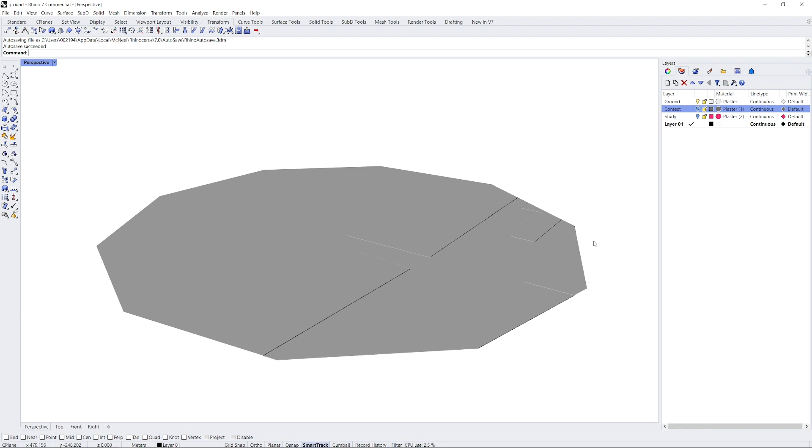The ground model should have minimal details and simplified topography. Only include essential grading, otherwise it can be created as a flat plane. Ensure the ground does not contain any large holes, seams, or disconnected surfaces. The ground should also extend past the extents of all context buildings.

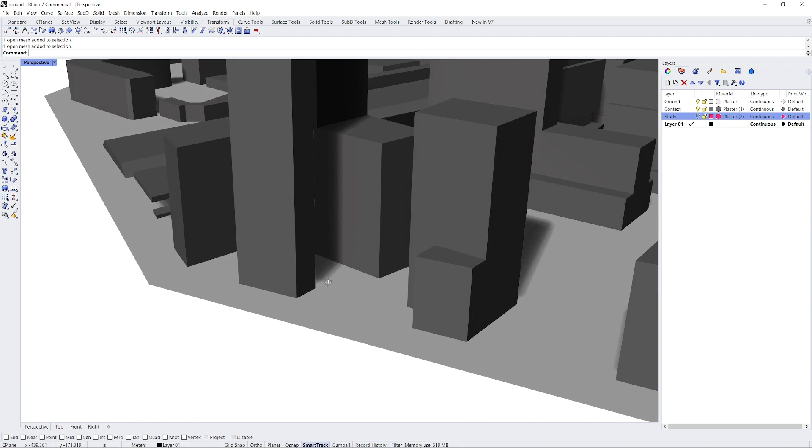The context model includes all surrounding buildings within a 250 to 300 meter radius of the project site. Ensure that all context buildings fully penetrate the ground surface, as buildings floating above the ground will have a negative impact on your simulation results. This can be done by extruding the bottom of any building geometry downward.

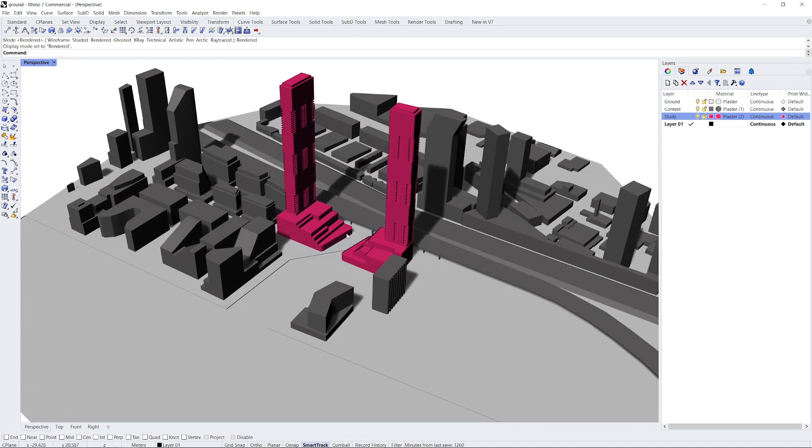The study model contains all elements that form the basis of the proposed development or existing structure. This model should lie near the origin of the project with coordinates 0, 0, 0, and the ground-study intersection point should have a z-coordinate of 0 meters.

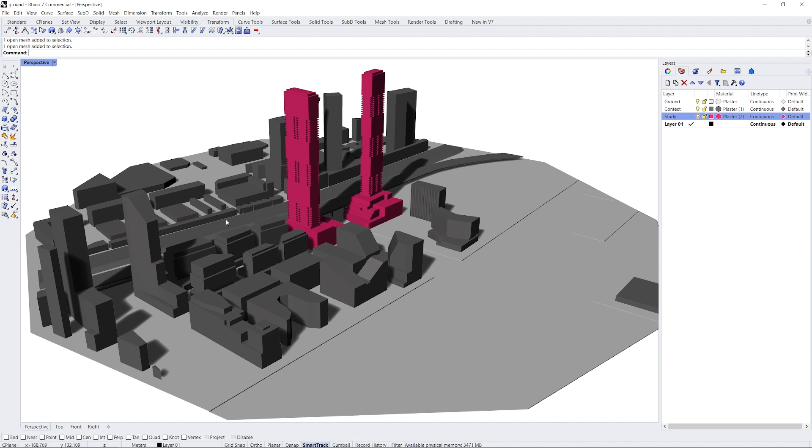All buildings should be free of any interior elements and be configured as a simple block massing. Exterior cladding elements or details smaller than 0.5 meters should not be included. The project should also not include small pedestrian level elements like railings, signage, seating, or thin columns. For an in-depth list of the types of details you should or should not include, please refer to our Preparing Geometry page on our help site.

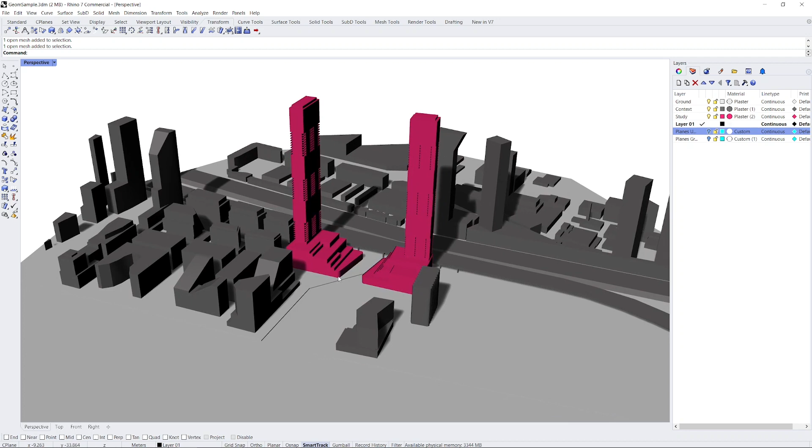In addition to your main 3 geometry files, presentation planes are also included at all locations where results are to be visualized. These areas can include the ground surface surrounding the study, outdoor amenity spaces, balconies, patios, or rooftops. Presentation planes must be raised 1.5 meters above the surfaces they are capturing and should be limited to areas wider than 3 meters. Presentation planes cannot be volumetric.

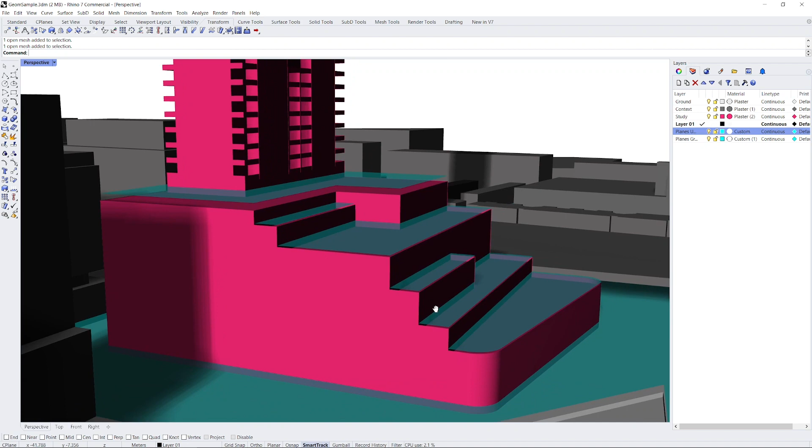They must be 2-dimensional and planar. They must also not intersect or collide with the ground plane. Volumetric or intersecting presentation planes will have negative impacts on the simulation results.

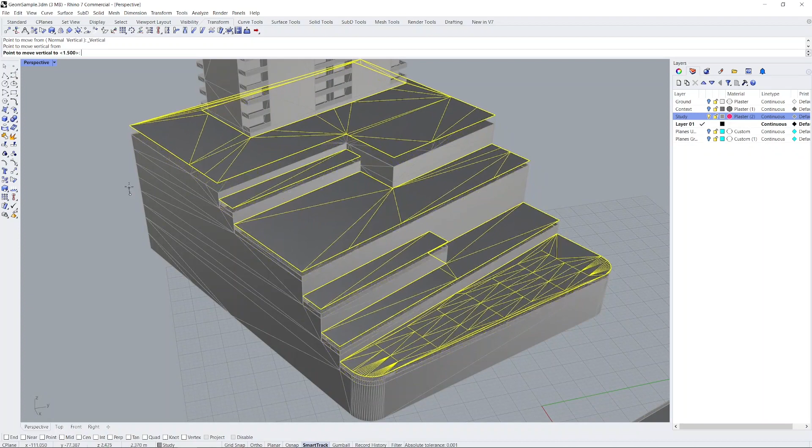A simple and effective way to create your presentation planes is to select the surfaces of interest on your study, duplicate them, and raise them by 1.5 meters. The ground level presentation plane can be created in a similar fashion, or by making a smaller plane that encompasses only the area around the study and raising it.

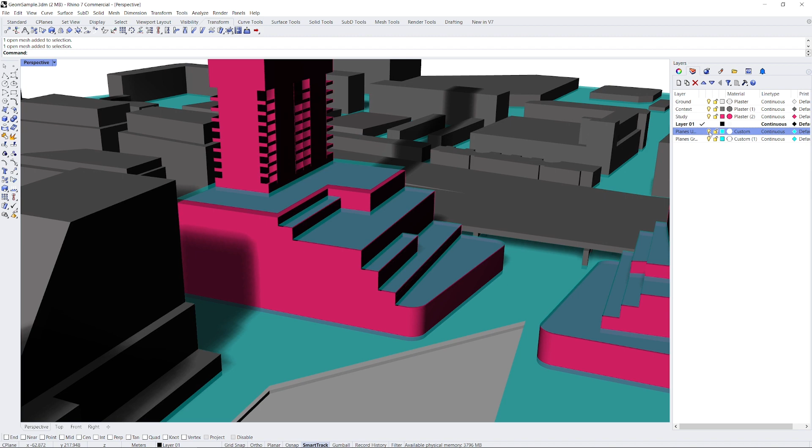Once all presentation planes are created, export them as their own STL file. Presentation planes can be uploaded together as a single STL or in subgroups based on the type of area they represent. Users can also upload optional geometry elements as overlays for visualizing streets, sidewalks, and objects that do not influence the simulation. Since presentation surfaces are raised 1.5 meters, raise overlays to 1.7 meters above grade to ensure visibility above results.

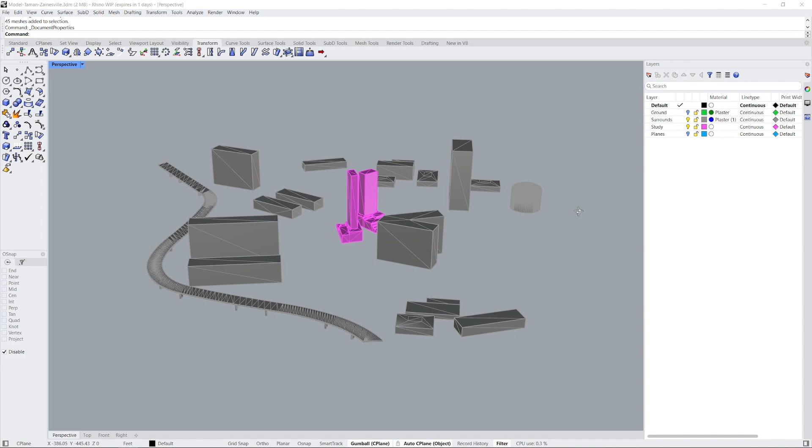Now that we've covered the essentials, let's look at a sample project with some common geometry issues and show how to prepare our project for simulation in the Orbital Stack application. In this project, we have 2 study buildings shown in pink.

The context, shown in gray, includes the surrounding structures, such as buildings and an elevated roadway.

Let's check the model units. This model was created in a 1:1 scale with feet. All geometry used with Orbital Stack needs to be in meters, so let's convert the units appropriately.

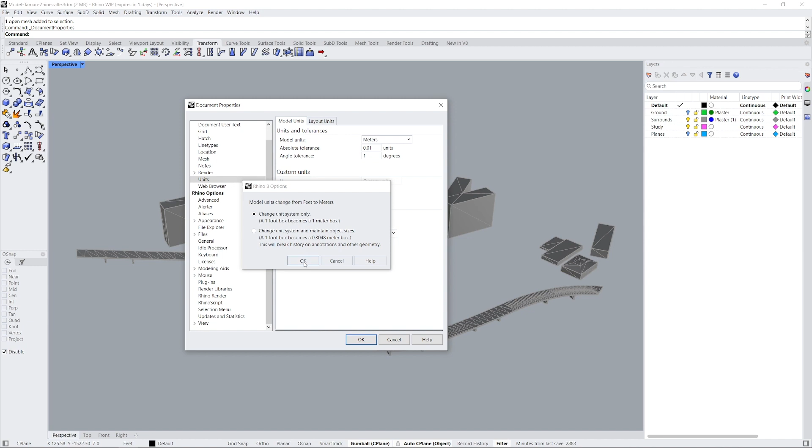Next, let's turn on the origin plane and confirm the geometry's position in 3D space. We can see that our project is elevated above the origin plane. Let's translate the whole project downward so that our project ground matches that of the origin plane.

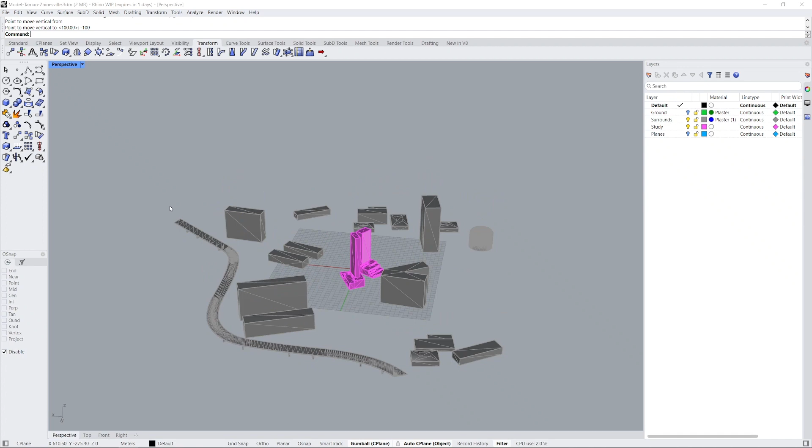This model also includes some small details around the base of the study building, some benches, and a nearby fire hydrant. These elements are too fine and should not be included in the simulation, so let's delete them.

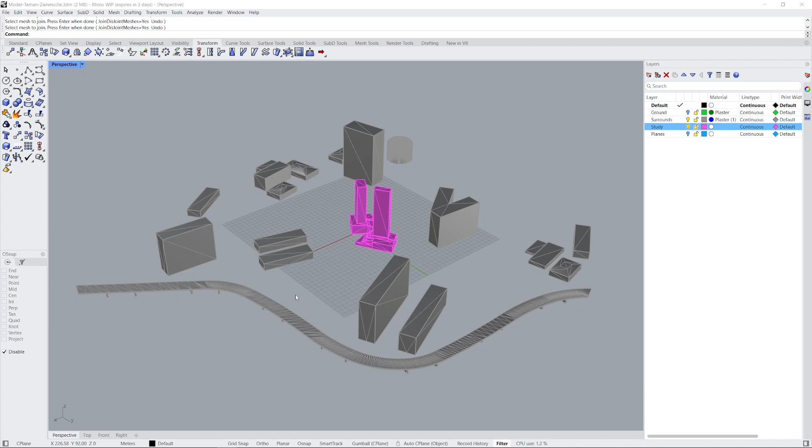We can see that the other buildings and structures in our model are modeled with an appropriate level of detail. Buildings are simple block massings and have no internal elements or fine cladding details.

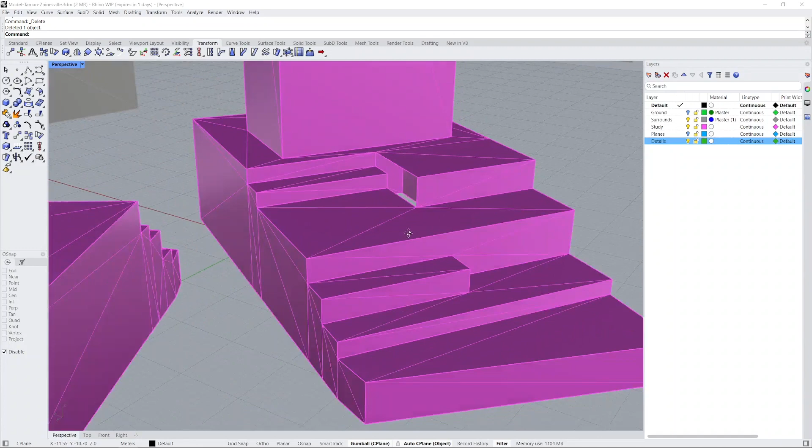Zooming into the base of our study buildings, we can see that they appropriately lie near the origin. There does, however, seem to be a couple holes in the mesh of one of our podiums. Gaps or holes in our structures will have a negative impact on our simulation results, so let's patch these up.

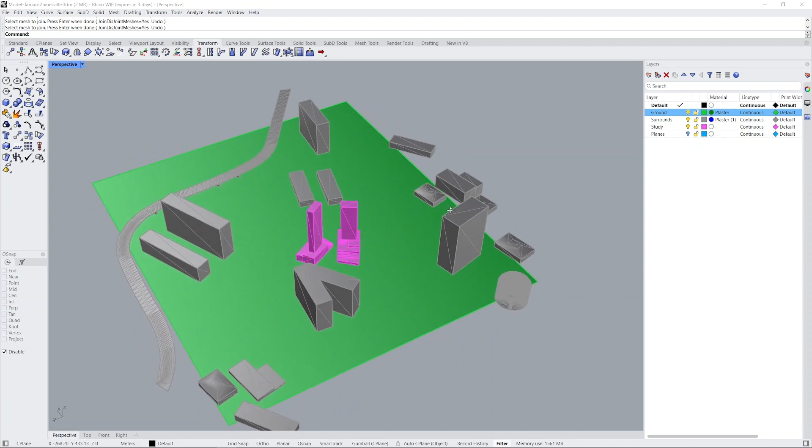Now let's have a look at the ground surface. Here we can see that the ground surface does not extend far enough to capture all of the context buildings. The ground plane should extend past the extents of all context models. So let's increase the size of the ground plane.

With our ground plane now appropriately sized, let's check to see if all of our buildings fully penetrate the ground surface. Looking from underneath the model, we can see which elements are showing through the ground.

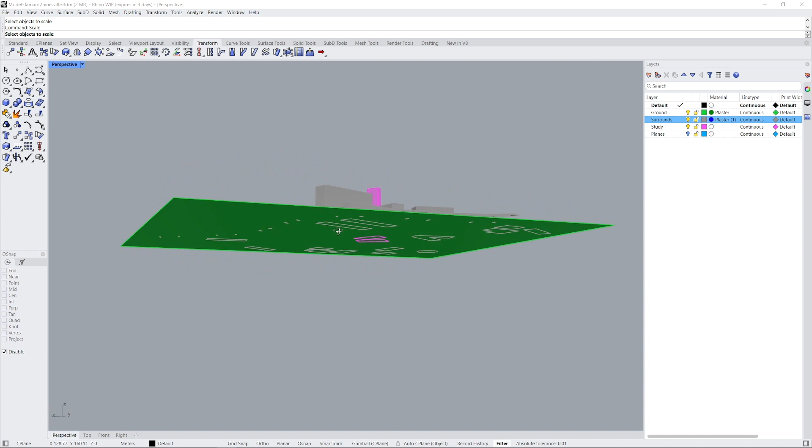It looks like two of our context buildings are floating above the ground, which can cause issues with our simulation results. So let's fix them.

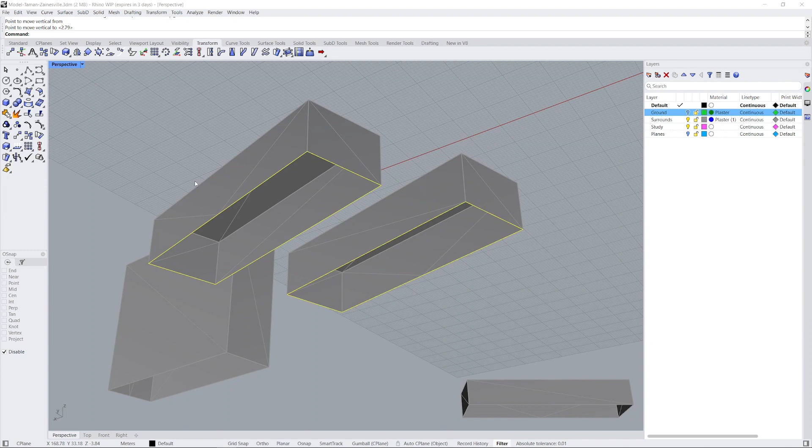The easiest way to correct this issue is to select and extrude the bottom of these buildings downward to penetrate the ground. Let's turn the ground model back on, and now we can see that the buildings fully pass through the ground surface.

Let's move on to presentation planes. In this project, we can see we have included presentation planes at ground level surrounding the study area and on various levels of the study building's podiums.

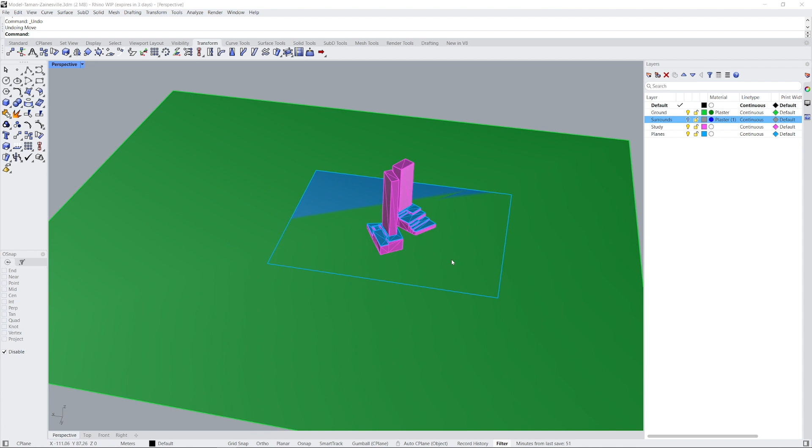There seems to be an issue with our ground level presentation plane. In this case, it's coincident with the ground plane and needs to be elevated above the ground by 1.5 meters. We can do this by simply selecting the plane and moving it upward. Now, the presentation plane lies at the correct elevation of 1.5 meters above grade.

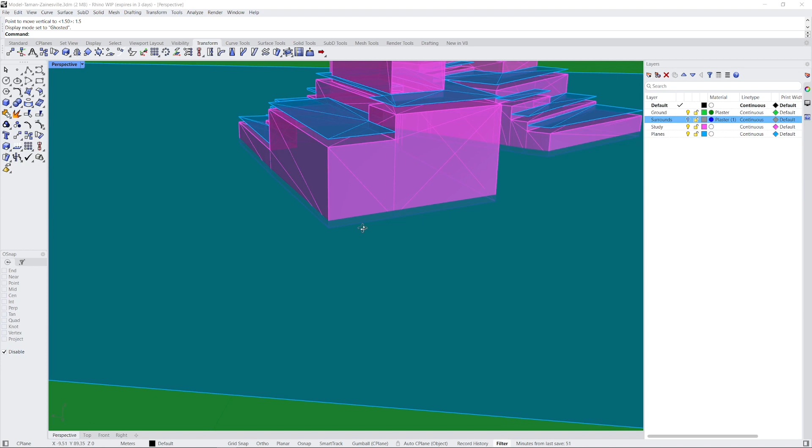Let's have a look at some of the presentation planes on our study buildings. On this first building, we can see that the presentation planes are raised appropriately at each level. How about the second building?

On this building, we can see that 4 of our presentation planes are not planar, but rather volumetric. Volumetric presentation planes will have a negative impact on our results. So let's recreate them and ensure that they are not volumetric, but rather two-dimensional and planar. We can recreate these surfaces by selecting the surfaces they are above, duplicating them, and translating them upward 1.5 meters.

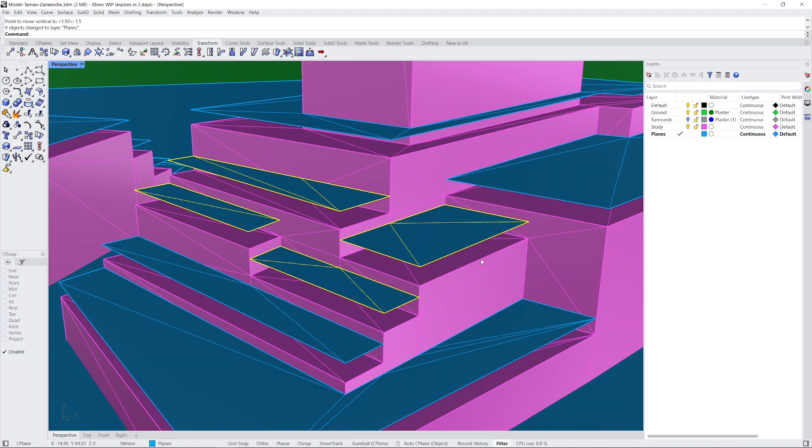With that, our project geometry is now simulation ready. All that is left to do is to export the parts of our project into appropriate STLs, a separate file for the study, the ground, the context, and the presentation planes.